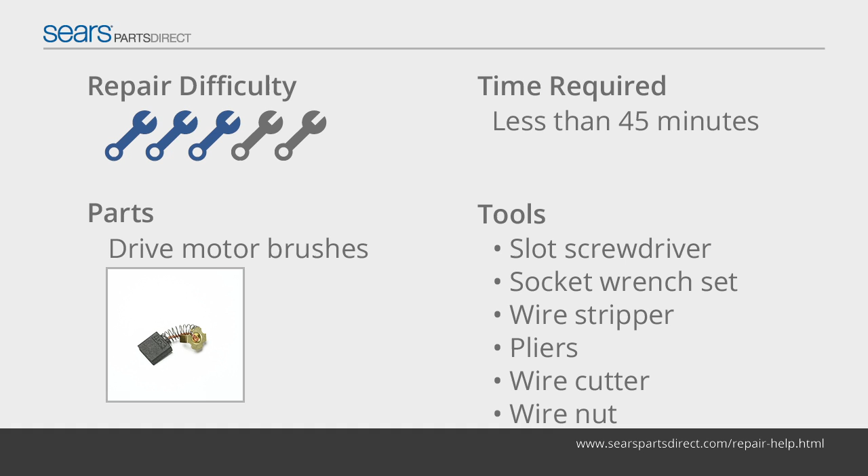On some models, you may be able to access the motor brushes without removing the drive motor. Before you begin, wear work gloves to protect your hands. Unplug the table saw's power cord from the wall outlet.

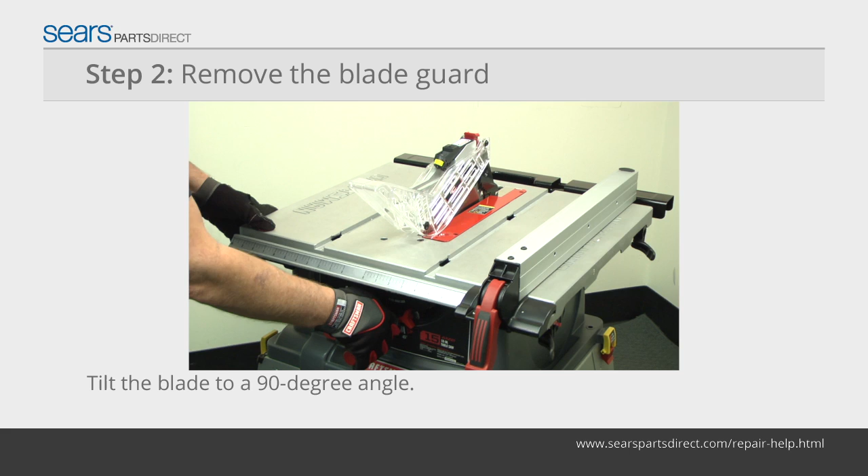Loosen the blade tilt locking knob and tilt the blade to a 90-degree angle. Tighten the blade tilt locking knob. Raise the blade to its highest cutting position. Push the red button on the blade guard and lift off the blade guard assembly.

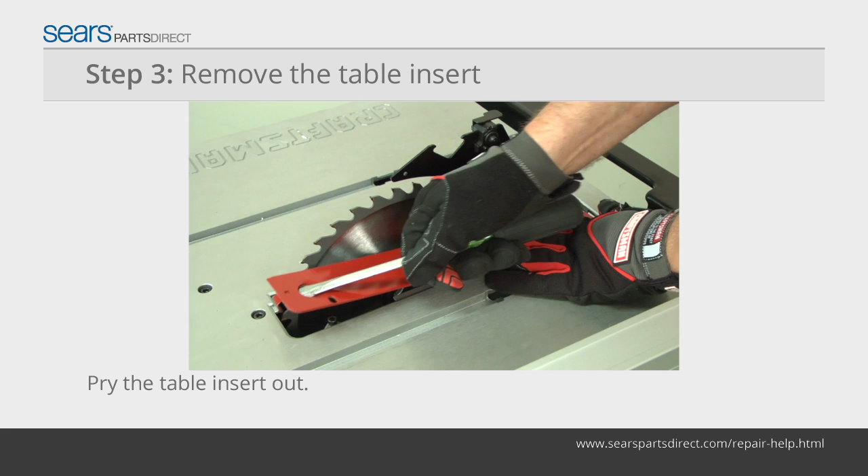Insert a slot screwdriver into the large hole in the table and pry out the table insert. Loosen the blade tilt locking knob. Tilt the saw blade to a 45-degree angle. Tighten the blade tilt locking knob.

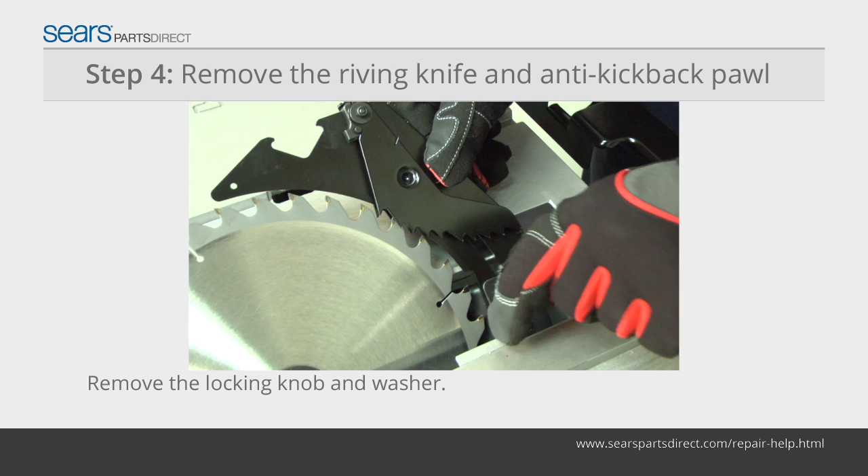Remove the riving knife locking knob and washer. Remove the riving knife, mounting plate, and the anti-kickback pawl. Loosen the blade tilt locking knob and tilt the blade to a 90-degree angle. Tighten the blade tilt locking knob.

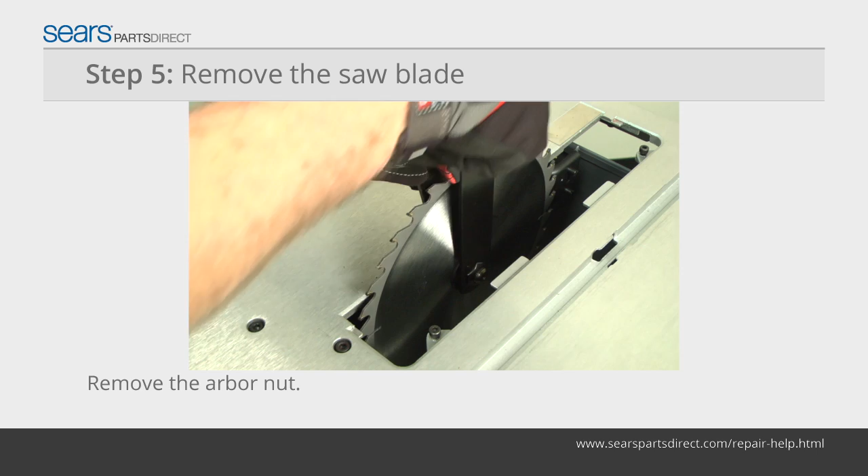Use the 2 wrenches supplied with the table saw to remove the blade arbor nut. Remove the outer flange washer and saw blade from the arbor. Flip the table saw upside down onto a protected surface.

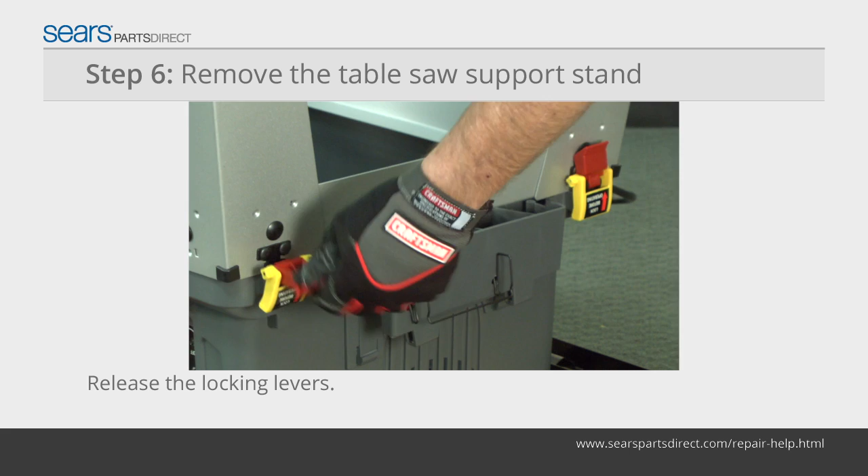Release the 4 table locking levers that secure the table saw to the support stand. Remove the table saw support stand. Release the 3 green ground wires from the ground wire bracket. Remove the on-off switch cover mounting screws.

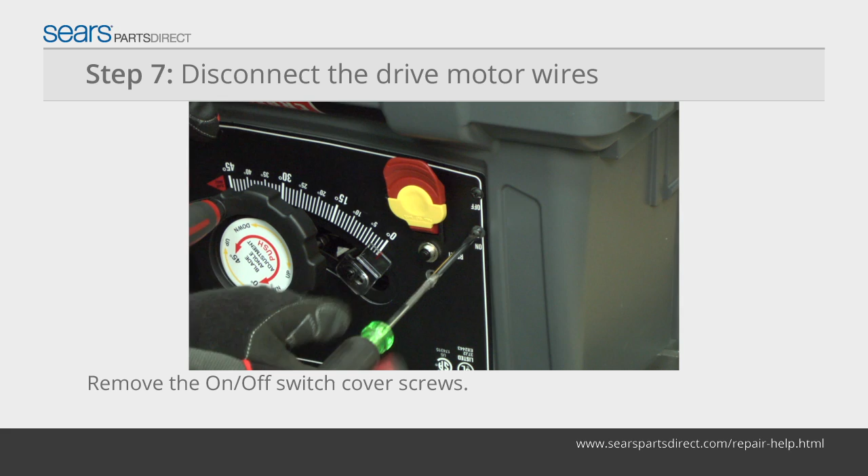Using a wire cutter, cut the white wire at the base of the wire crimp. Pull the black drive motor wire off of the reset switch. Using pliers, pull out the motor wire strain relief. Pull the motor wires out of the on-off switch box cover.

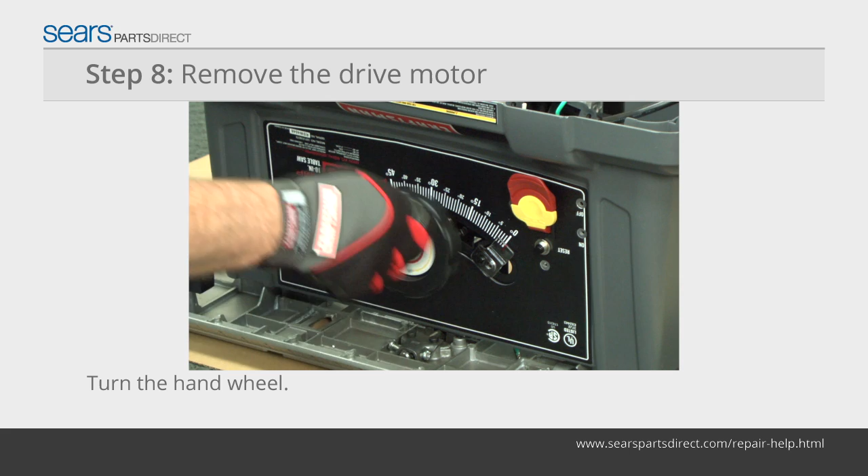To lower the motor down, rotate the hand wheel to the lowest motor position. Remove the 4 mounting bolts and brackets. Pull out the motor. Use a slot screwdriver to unscrew the brush caps, and then pull out the motor brushes.

Insert the new brushes into the motor and reinstall the brush caps. Position the drive motor in the saw. Reinstall the 4 motor mounting bolts and brackets. Push the motor wires onto the on-off switch box cover and reinstall the strain relief.

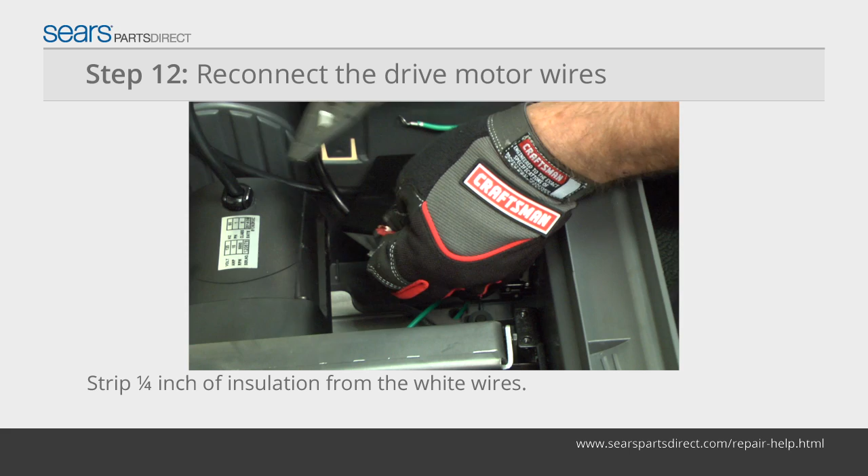Use wire strippers to strip a 1/4 inch of insulation from the white wire ends. Connect the white wire ends using a wire nut. Connect the black motor wire to the reset switch. Reinstall the on-off switch cover using the mounting screws.

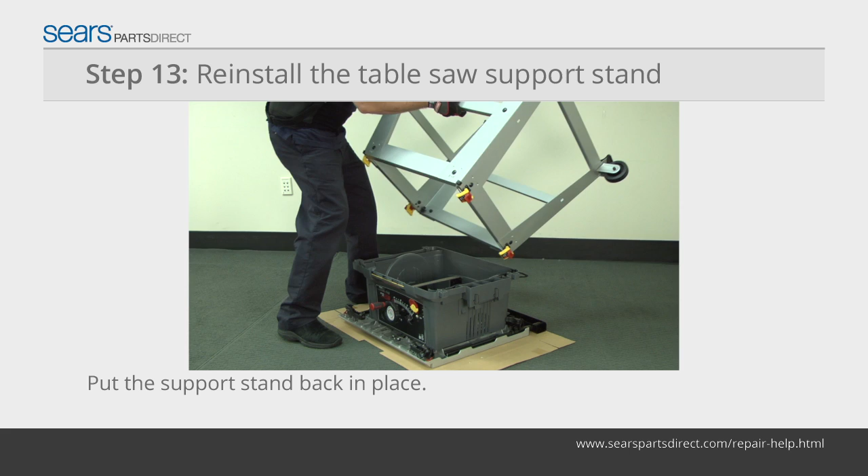Reconnect the 3 green ground wires to the ground wire bracket using the mounting screws. Position the support stand on the saw base. Lock the levers to secure the stand to the base. Flip the table saw upright.

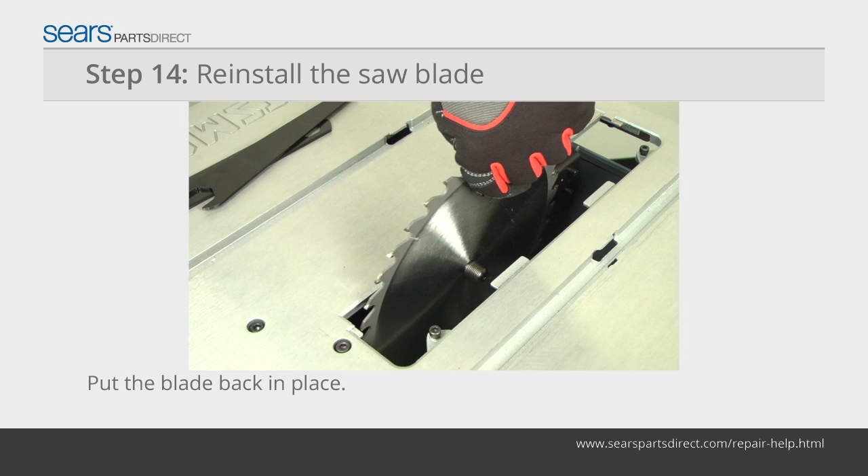Rotate the hand wheel to raise the motor to the highest position. Position the blade on the arbor and reinstall the flange washer and arbor nut. Firmly tighten the arbor nut using the 2 blade wrenches supplied with the table saw.

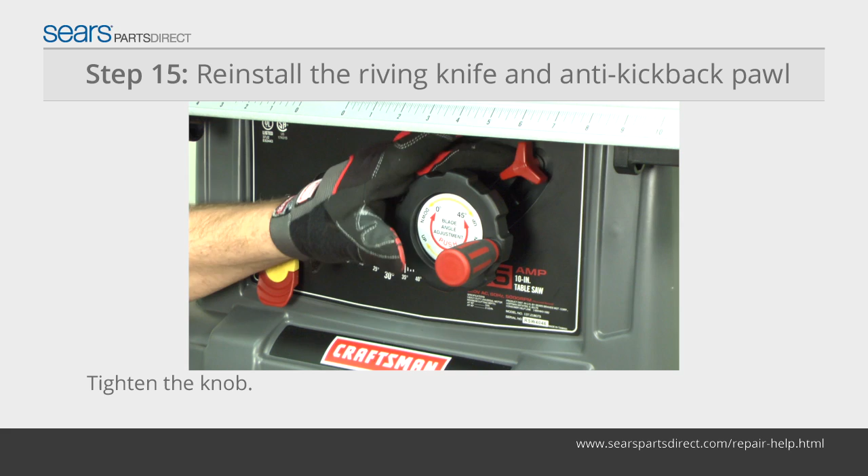Loosen the blade tilt locking knob. Tilt the blade to 45 degrees and tighten the blade tilt locking knob. Reinstall the riving knife and anti-kickback pawl. Reinstall the mounting plate. Reinstall the washer and riving knife locking knob. Firmly tighten the riving knife locking knob.

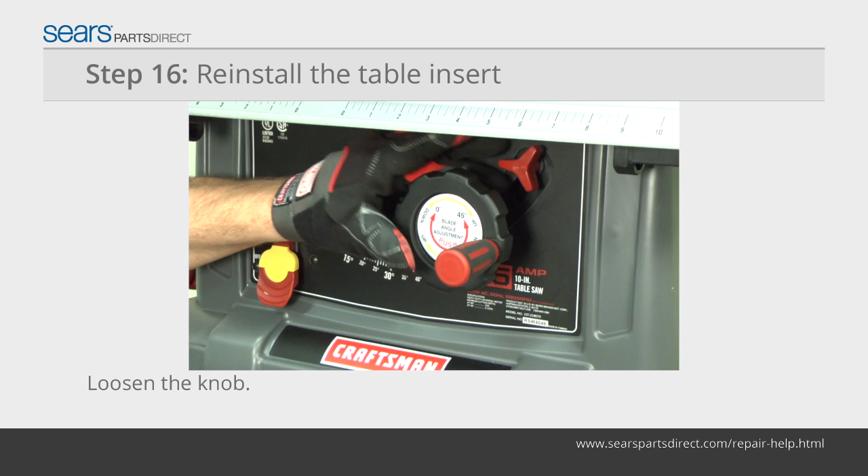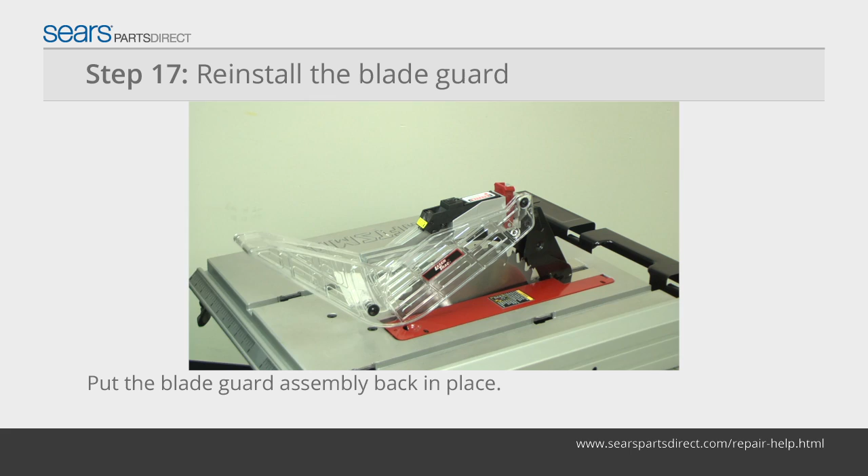Loosen the blade tilt locking knob. Tilt the blade to 90 degrees and then retighten the blade tilt locking knob. Push the table insert into the top of the table. Push the red release button on the blade guard and reinstall the blade guard assembly on the riving knife. Plug the table saw into the electrical outlet.